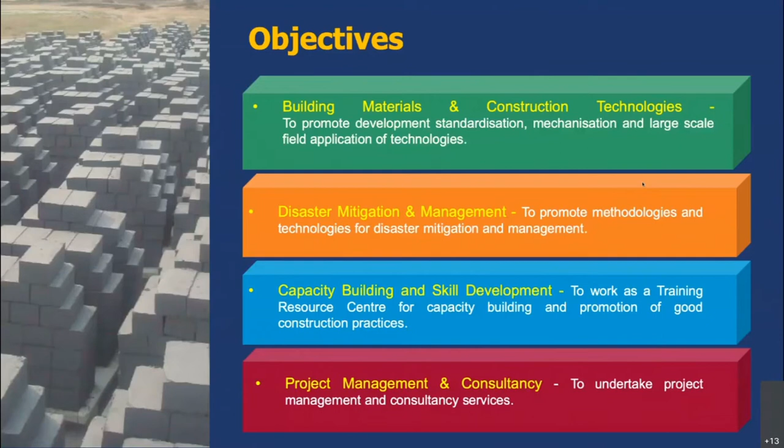These are the areas in which we work: building materials and technology promotion, building materials and construction technologies, disaster mitigation and management, capacity building and skill development, and project management. I just wanted you to understand that. Now, this has already been talked about, but it has become more pertinent as of today. I think the CPWD DG will also talk today.

I still remember, way back in the 90s, because of so much deforestation, there was a ban on the use of wood in building construction. But that ban was revoked, and now we need to promote wood together as a building material, because from whatever we have heard so far, we all will agree that wood is a wonderful material, it's a sustainable material, it is based on renewable resources and things like that. So I've just jotted down those points. Please bear with me if you find it repetitive.

It's a versatile and organic material, and anything which is organic is welcome, because we have to reduce our carbon footprint, we have to have green and clean technologies, and it is a renewable construction material. Wooden structures also have properties that make them durable and strong. Earlier wood was used, stone was used, and then slowly concrete came and replaced everything. But the beauty of wood is that it is equally strong in tension as well.

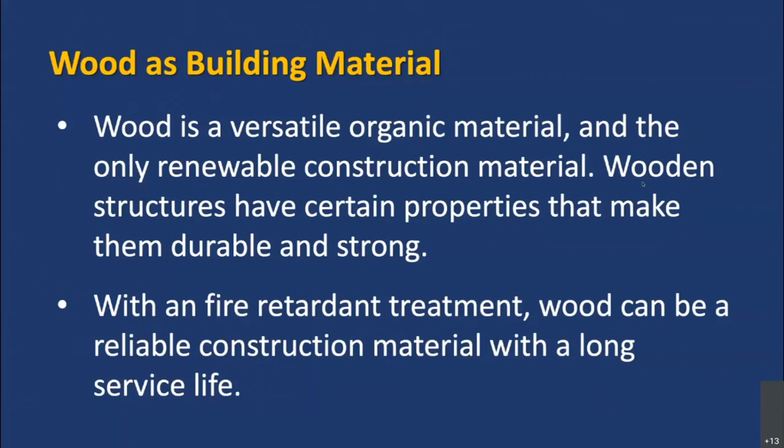Also, when we talk about fire, fire is one of the urban hazards which is playing quite a notorious role when we talk about development. And all of us know that wood, if it is treated, becomes fireproof. Also, wood gains strength up to a certain temperature, whereas steel as well as concrete lose their strength when subjected to fire.

Whenever any new thing is being talked about, its functional performance is always questioned. We talk about structural performance, and most of these materials are all good as far as structural performance is concerned. But functional performance means in terms of fire, acoustics, thermal comfort, aesthetics, and maintenance.

We are signatory to the Paris Agreement, and it's an effort to be made by all of us, because the building sector makes use of energy, makes use of water, a precious natural resource, and at the same time emits greenhouse gases, uses resources, and generates solid waste, carbon dioxide, and so many things. So we need to be sustainable, and we need to use sustainable and renewable materials.

Another advantage of wood: earlier we were talking about deforestation, and now the new norm is afforestation. Whenever we take wood, we need to replenish that wood, so it can be easily replenished, and that is why wood is a sustainable material.

Also, I've just taken it from the internet that houses, workplaces or schools which are surrounded by wood have positive effects on the body, the brain and the environment, and can even shorten hospital stays through reduced recovery times. So that was a study done.

And let me also tell you that as a structural engineer, as an architect, when we talk about structural functional performance nowadays, we also talk about comfort to the occupants. So comfort of occupants inside, air quality, that is also one of the parameters when we select any technology or building material. So in that way, wood again stands out.

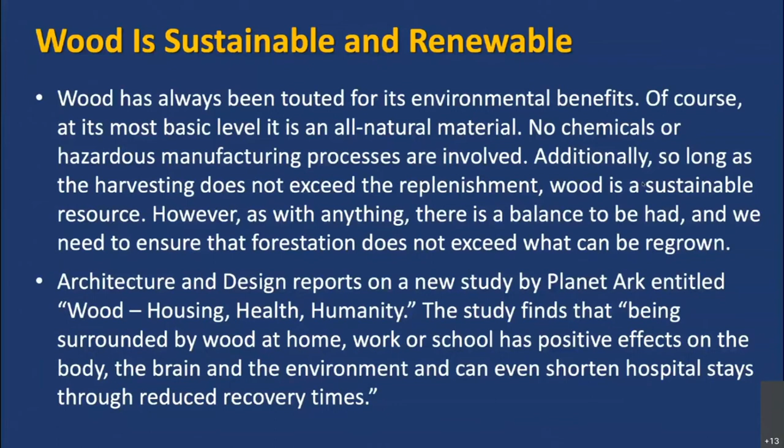Also, I already covered that CPWD declared that the ban on wood was revoked from its construction agenda. It was put in place in 1993, but then it was revoked. And also, there was a representative from the Ministry of Environment, Forest and Climate Change.

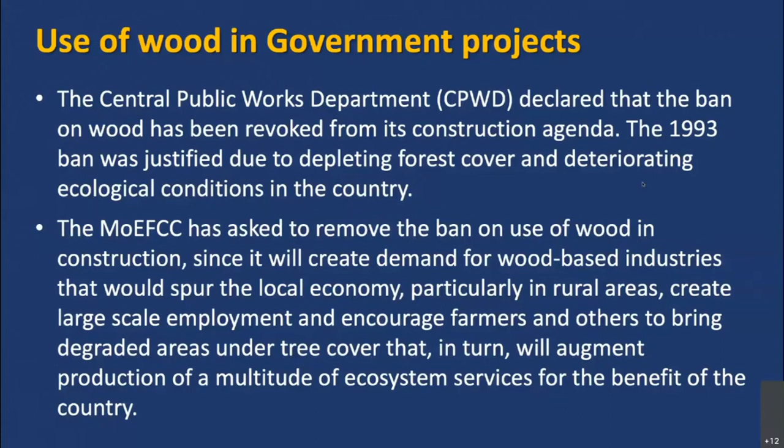We need to promote wood and its use in building construction and in other industries, so as to boost the local economy. And in the wake of the clarion call given by the Honorable Prime Minister of Atmanirbhar Bharat, self-reliance, we need to promote the wood-based industry and use of wood as a building material and in building construction.

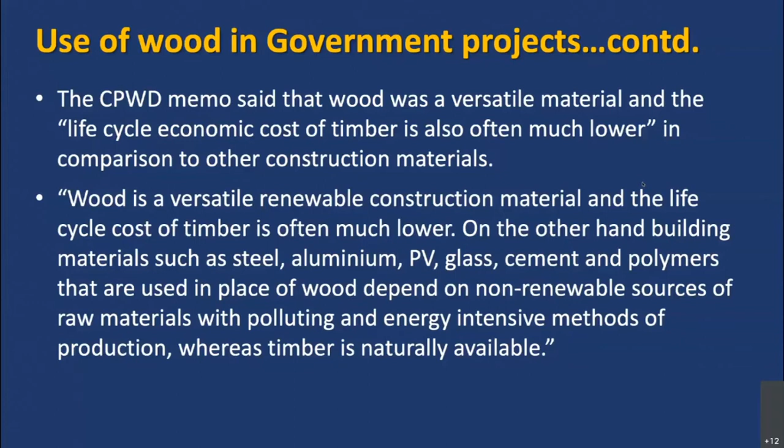Also, in government projects nowadays, wood is being used, and all of us know that if we compare it with concrete, steel, aluminum, and cement, these materials are based on finite natural resources which are non-renewable, and at the same time, they are energy intensive, requiring a lot of embodied energy, right from extraction to manufacturing and then construction, whereas timber is naturally available.

There are some of the things which we have done at BMTPC. I'm a big fan of bamboo, and BMTPC has developed bamboo mat corrugated roofing sheets, which are a replacement for your CGI and ACC sheets. This was developed with IPIRTI, which is also in Bangalore, and there is an Indian standard in place, and departments like railways, while making platforms, are using these bamboo mat corrugated sheets. So it's a very sustainable replacement of ACC, GI and the other sheets in practice.

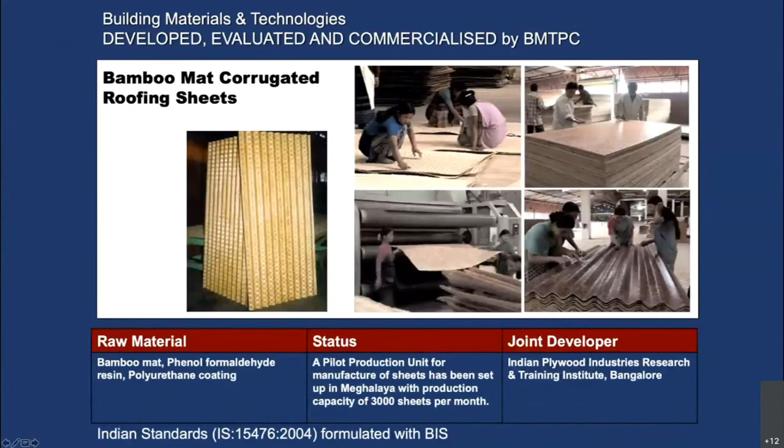And I think by this time all of you know the chemistry behind it. All you have to do is take bamboo mat or any raw material, put some kind of resin, put it in a hot press, and you get a board or a building product which is as durable, as good as your other materials. Okay, so we have also developed a bamboo mat ridge cap, which is this. Then you connect it to bamboo mat corrugated roofing sheets. So at a ridge you have to have a ridge cap.

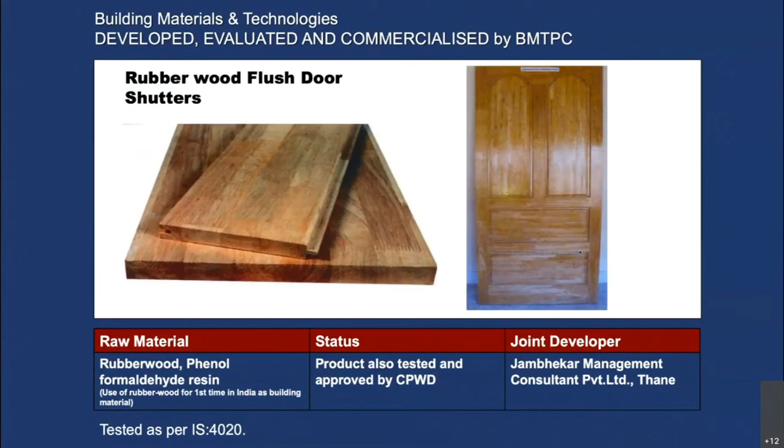Apart from this, there are a number of products available based on plantation timber. One of the versatile plantation timbers is rubber wood, and rubber wood flush door shutters are also being promoted by BMTPC, and it has also been approved by CPWD. Also poplar wood, another plantation timber, can be gainfully utilized to make flush door shutters. Okay.

And then sometimes the problem comes in joining this wood and making it in the form of a lumber. So BMTPC, in collaboration with IPIRTI, has also developed a machine and a technology for finger jointing and shaping, so that you can have big lumbers which can be used either as a beam or as any other structural element. Okay, so any plantation timber, whether it is rubber, poplar or eucalyptus, can be cut, and these slender pieces can be joined to produce a longer and bigger component.

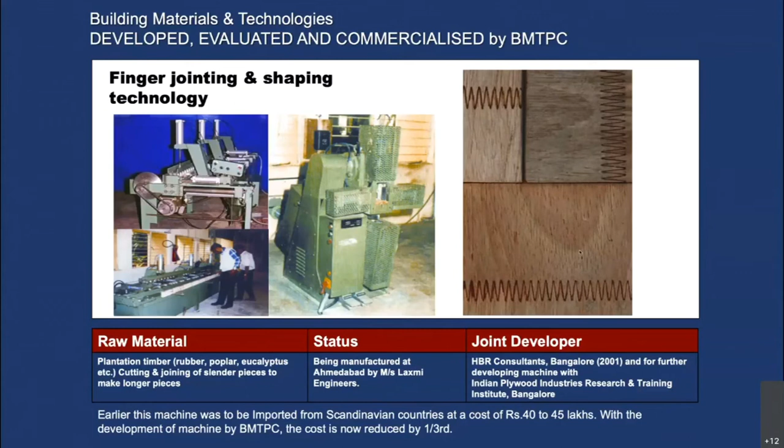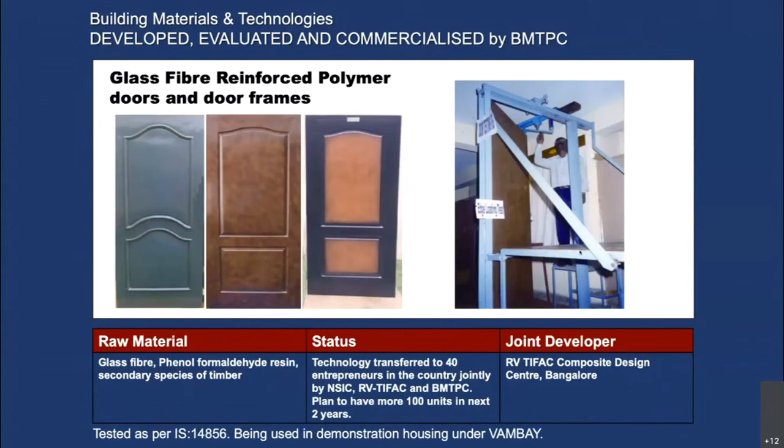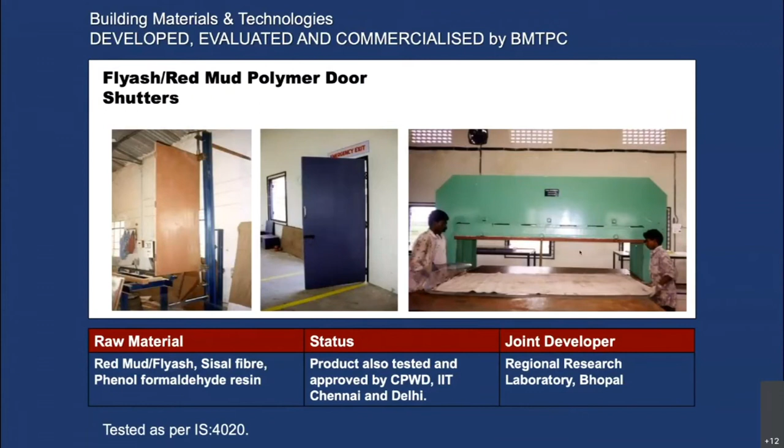Okay. Then all of us know about door and window frames. Now, a lot of wood is used in door and window frames. Also, red mud is a byproduct of the aluminum industry, and it can be mixed with sisal fiber. There is a CSIR laboratory in Bhopal which is doing a lot of research and development on these red mud door shutters.

Now, let me also briefly come to this, because I come from the Ministry of Housing and Urban Affairs. We are also promoting wooden homes, and wooden homes are very popular if you go to other countries. And now let me share with you that in India also there are a number of companies providing the entire support. On a design-build basis, they are providing ready-to-move wooden homes.

If you have a site and you want to have a wooden home, they will do the complete solution for you. And the advantages, I don't need to dwell on time and again. Wooden homes are very energy efficient. The energy requirement is less. And somebody was talking about life cycle costs. See, wooden homes and wooden materials have very low life cycle cost.

And life cycle cost is something which we need to consider whenever we want to select any technology or any material, because of the energy efficiency, because of eco-friendliness and other parameters. We need to have materials and technologies which have low life cycle cost.

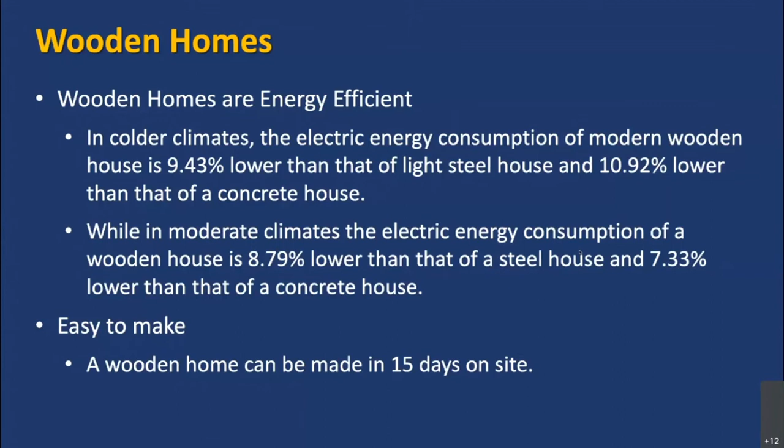Okay. And these wooden homes are quick to erect, and as I told you, there are companies in India who are doing this kind of work, and several homes and villas and resorts have been erected using these wooden structures. Okay, and this is a green building.

When we talk about wooden homes and durability, normally any new material or any new technology is always compared with brick and concrete. So the life of wooden structures, and there are so many historical structures which stand testimony to this, is more than a concrete house. Okay. And I think it is written here that there are a few churches in Norway which have been standing there for more than 100 years.

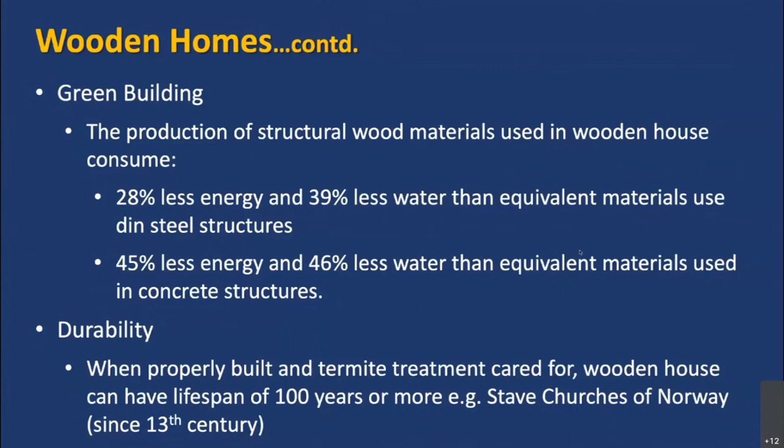Now, let me also tell you that India is a country where we have several natural hazards, and earthquake is one of them. And all of you know the way construction takes place in tier 2, tier 3 cities and our villages, where we have all unreinforced masonry structures, brick structures or stone masonry structures, which are never reinforced.

And you all know the classical way the buildings are built in J&K, in Himachal Pradesh, where they use stone with wood. So wood is used as a softener, because wood has an excellent property to withstand earthquake loads. Okay, so in India it is quite relevant to make use of wood in building construction, and flexibility and efficiency is quite good. Any kind of structure, any kind of architecture, shape or form can be produced using wood.

And health and comfort, as I have been telling you, in earlier times we were never bothered about the health and comfort of the occupants. But let me tell you that the inside air is more polluted than your outside air. Okay, there have been several studies on this, and if I have to quote, there is a study by UNEP which says that inside air is 4 to 5 times more polluted than the outside air.

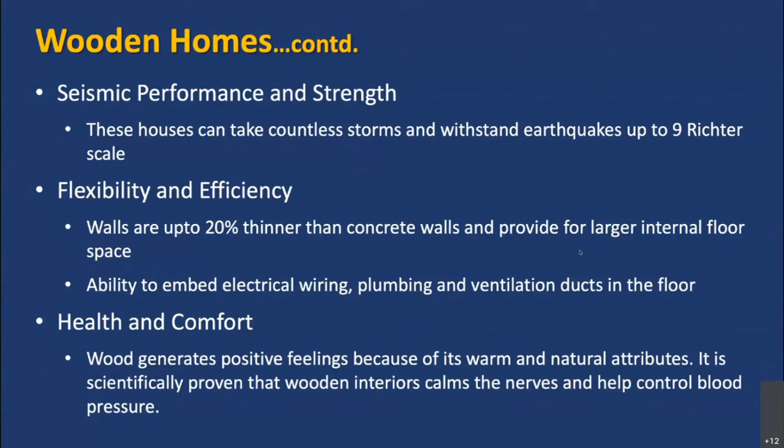And it happens because of the kind of materials we are using. So wood is something which can generate positive feelings. It can give better health and comfort and also help in improving the indoor air quality.

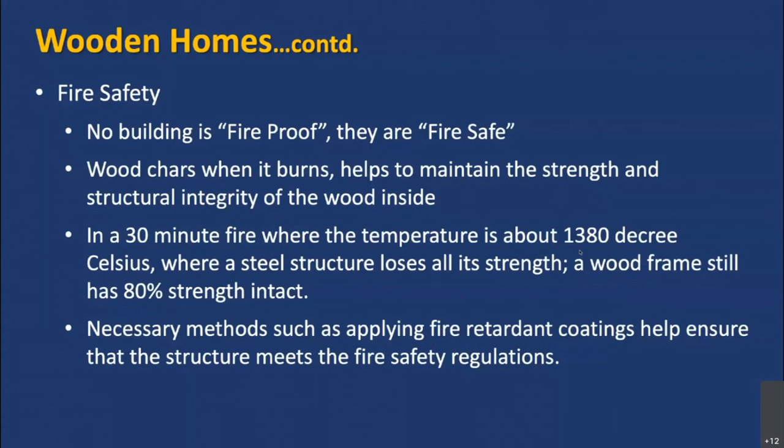Okay, and fire safety, I talked about: wood, when it burns, it chars, and it maintains its strength and structural integrity. Whereas if we compare it with other materials, they lose their strength. So in a 30-minute fire where the temperature is about 1380 degrees Celsius, a steel structure loses all its strength, whereas a wood frame retains 80% of its strength. So there are a whole lot of structures which can be thought of.

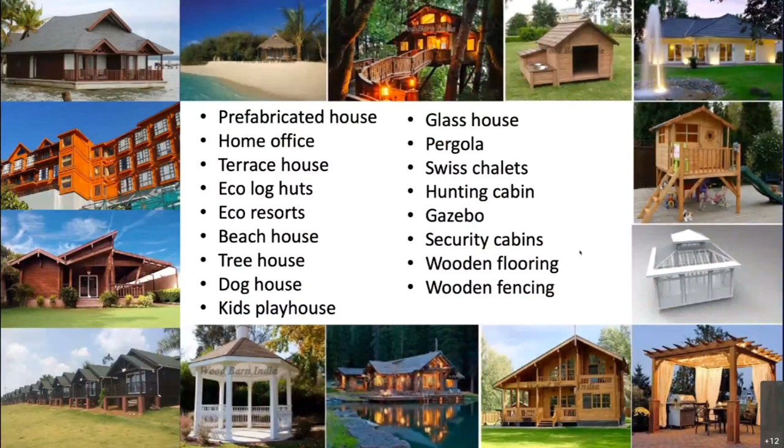Okay, so a whole lot of things you can see, and as I told you, there are companies now who will give you customized, tailor-made solutions. So right from house to office to flooring to fencing to tree house to gazebo to pergola, everything can be made with wood. And this wood can be used in a variety of ways. You can use natural wood, you can use engineered wood. Nowadays engineered wood has also become very popular. You can use plantation timber, and bamboo is another option.

So I'll just leave you with these pictures. These are pictures from India itself, and there is one agency who is doing wooden works. These are houses which are made completely with wood. The structural system is of wood, and other things are also being done with wood.